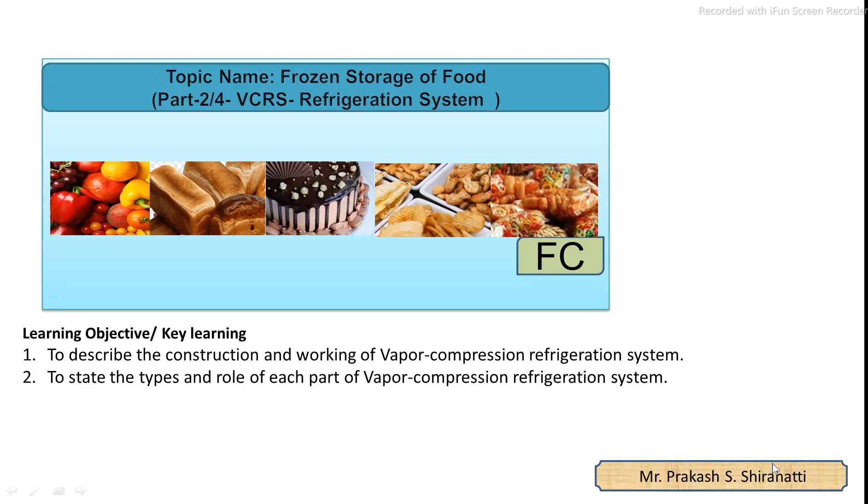In this second part, we will discuss the vapor compression refrigeration system, including its main parts, construction and working, the types of its parts, and how the system works. In refrigeration or frozen storage systems, preservation of food is done using low temperature, and the main important equipment is the vapor compression refrigeration system.

Refrigeration systems are available in different types, but mostly the vapor compression refrigeration system is used in the food processing industry.

The refrigerant, the working substance, flows continuously inside the tube from compressor, to condenser, then receiver, expansion valve, then evaporation section, then back to compressor. This is the total cycle in which the working substance flows from one main part to the next.

Refrigerants are categorized into mainly two groups: the primary refrigerant, which flows inside the refrigeration system, is called the primary refrigerant. And the secondary refrigerant, which is sometimes used in processing for heat exchangers for further processing.

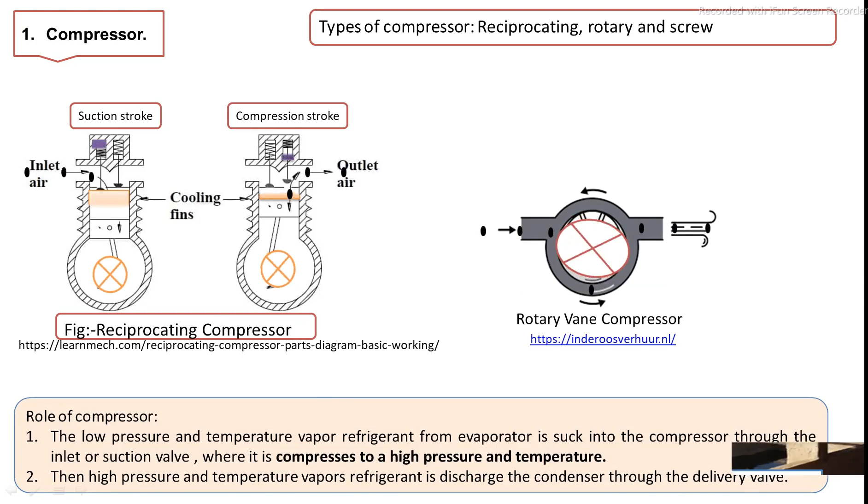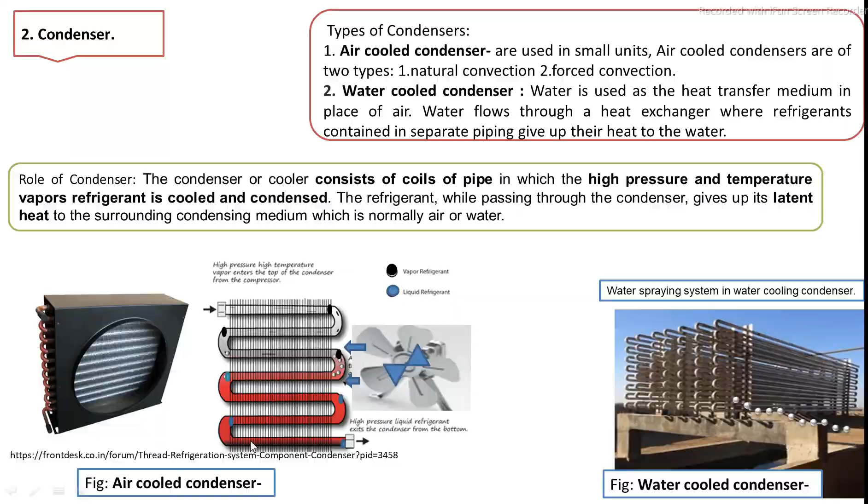That means the cooling of the refrigerant is carried out by providing fans. That means air is continuously blown on the condenser. You can see the refrigerant from the compressor is condensed, so these vapors are converted into liquid during the condensation process. Next, after the condensation process, the liquid refrigerant is fed into the receiver section.

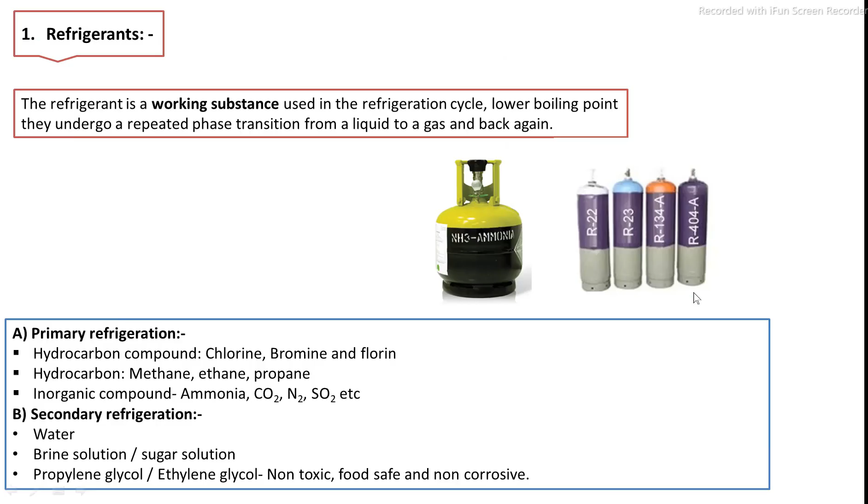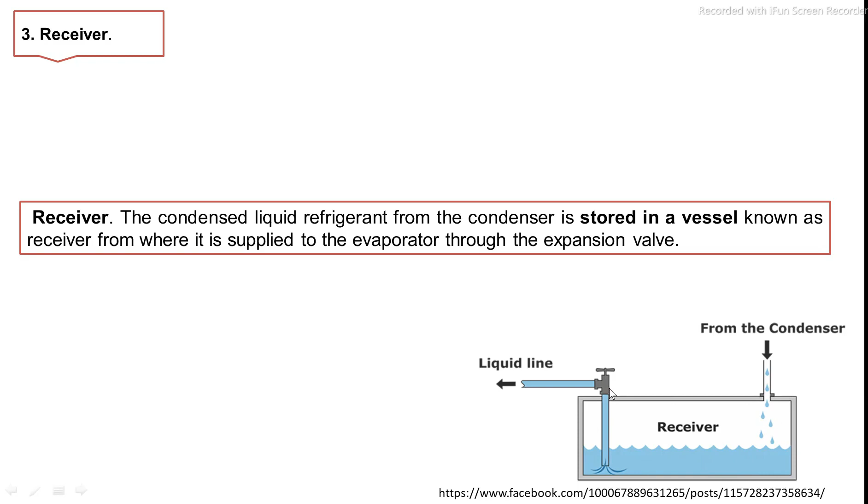You can see this is the receiver section, which is a simple storage tank. After the condensation process, this is the receiver. The condensed refrigerant is stored in the receiver. This is only a storage tank in which they maintain the level of the refrigerant. This refrigerant is then fed into the expansion valve. Next, after the receiver section, is the expansion valve.

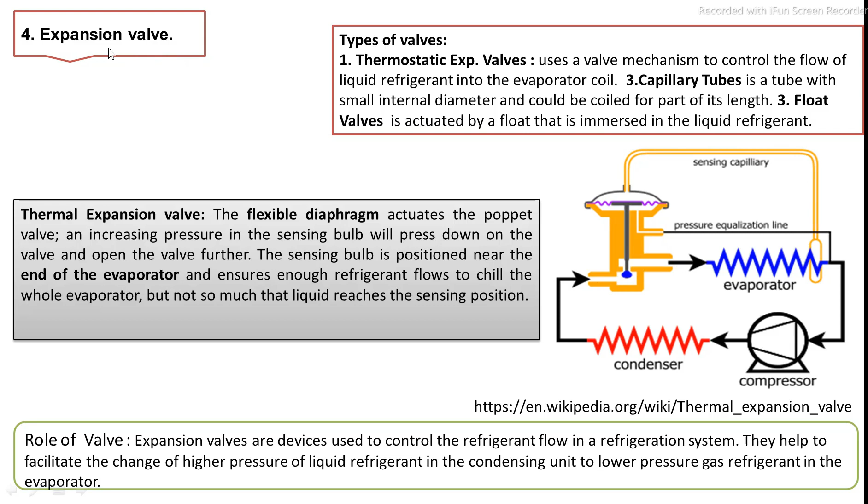This is the sensing capillary tube, which is filled inside with sensible gases. That means in the evaporation section, if its final temperature increases, then the gas expands and this valve is pressed, resulting in the refrigerant being circulated. The main role of the expansion valve is to reduce the pressure and properly supply the refrigerant in the refrigeration system.

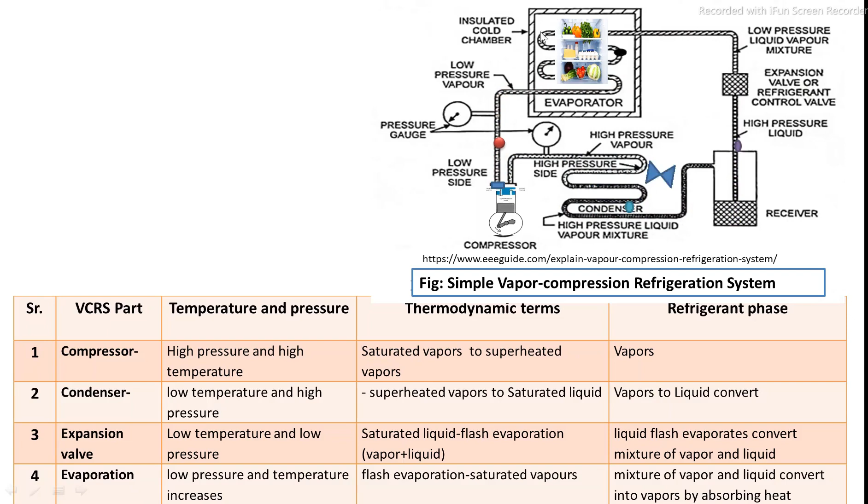Next, after the expansion valve, almost 50% of the refrigerant is converted to vapor and 50% is in liquid state. This is the thermal expansion process, resulting in its temperature decreasing, and this mixture is then fed into the evaporation section. In this evaporation section, the evaporation of the refrigerant occurs: whatever food we store around this evaporation section, its heat is absorbed, resulting in the refrigerant temperature increasing and its evaporation occurring.

These are the evaporation tubes, similar to the condenser tubes, and these are the fans provided. You can see this sketch totally explains how the refrigeration system works. This is the cold storage room, in which only the evaporation pipes are fitted inside, and all remaining parts, that is the compressor, condenser, and expansion valve, are outside of the refrigeration room. Inside the room only the evaporation pipes and circulation fans are fitted.

You can see first there is the compressor, then the condenser, then the expansion valve, then the evaporation tubes, in which the liquid ammonia temperature is very low, -30 to -40 degrees Celsius, so when we store food in the cold room, the heat contained in that food is absorbed. That means heat transfer is carried out, resulting in the ammonia temperature increasing and evaporation occurring. The liquid ammonia is again converted to vapor, and these vapors are fed again into the compressor. In this way, this cycle runs continuously and the refrigeration effect is carried out in the evaporation section.